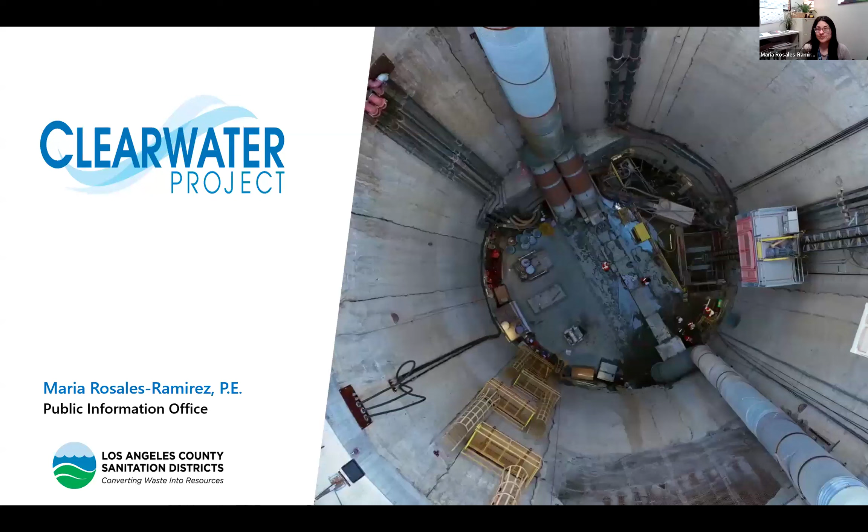Thank you. Hi, everybody. Thank you so much for the opportunity to be here. My name is Maria Rosales Ramirez with the LA County Sanitation Districts, and I'm here to talk to you about the Clearwater project, which is a project that I've been working on for the past 5 years. And actually, it's been a multi-decade long project for the sanitation districts. So this is a great opportunity to highlight the work that we do. Just to start off, I realize that many of you may not know who the Sanitation Districts of Los Angeles County are. So let's get a little bit into that.

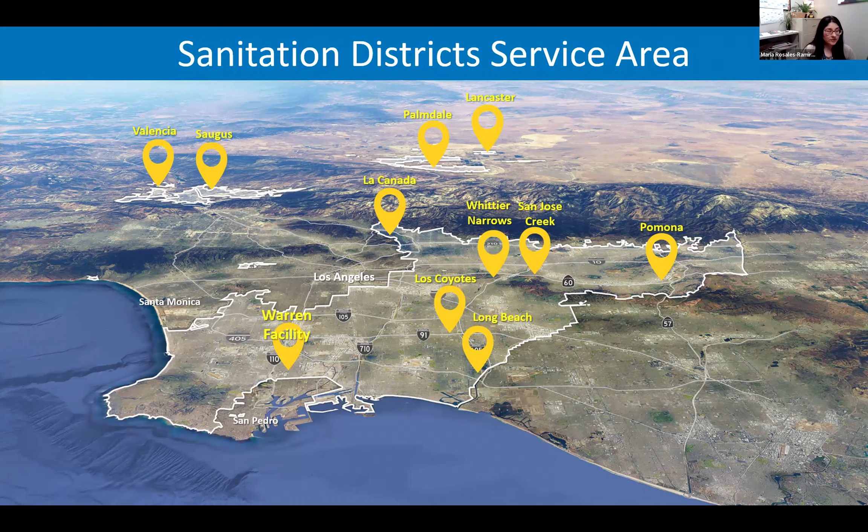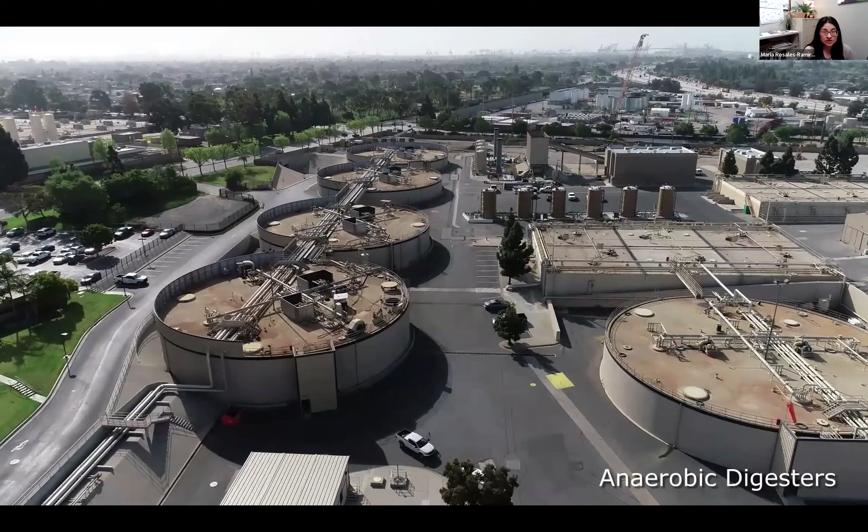This facility is quite unique because it does so much for LA County, just in terms of the services that we're able to provide. So I don't know if any of you are local. For those of you that were visiting on site, we met here. If you're driving down the 110 freeway, just past the Clearwater, you're able to pull over and see it. But this facility is the largest water treatment plant for Los Angeles Sanitation District, meaning we can receive up to 400 million gallons of wastewater a day.

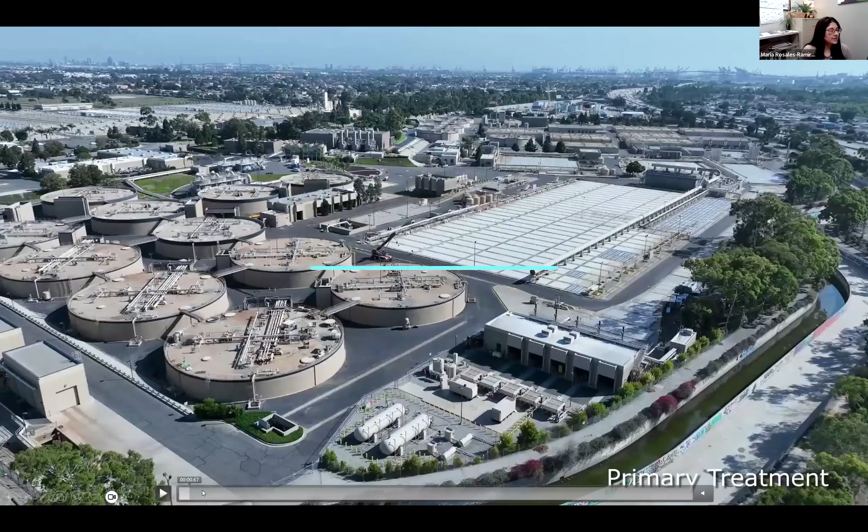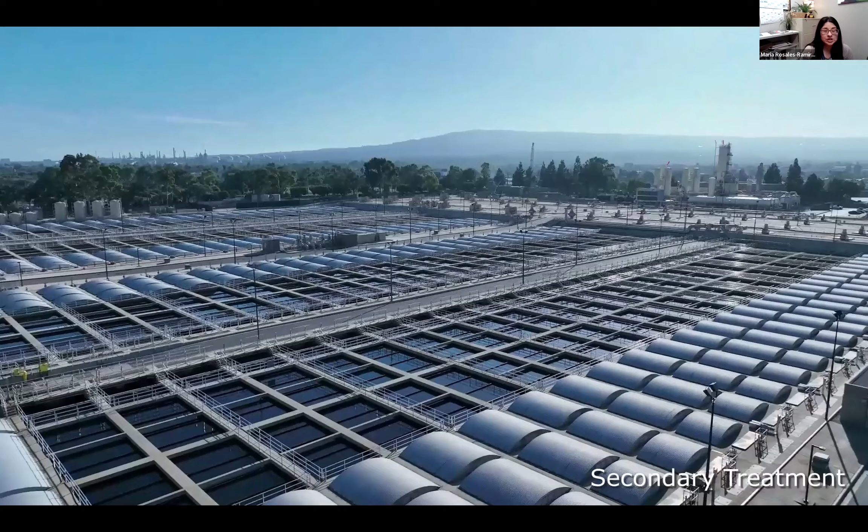And what we're seeing in the video, I'll replay the video a little bit again so you can see, is the different treatment processes that we have right here. We're going over our primary and secondary treatment. Again, we use standard processes to clean the water, and that's what we're seeing right here, our secondary treatment plants. But also we have so many other facilities ancillary to the wastewater treatment system. And this is our solids management. We're going to cover that in a little bit. And we have our power plant.

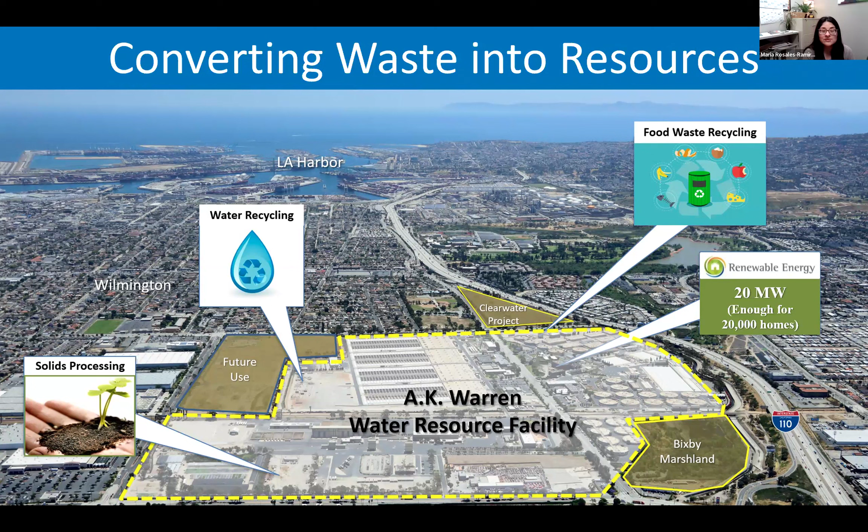And we also do solids recycling. So anything that comes into our wastewater system at this facility will get recycled at some point. So that's certainly exciting. But that's not the topic of today's presentation. That's a separate presentation that I'd be very happy to give if anybody's interested. The subject of this presentation is what happens to the water after it leaves the Warren facility. And those of you familiar with this area will say, well, you manage the water and you recycle the water, but where does the water go?

that was built in 1958. And that's how the Warren facility is able to clean the water and take it out to the ocean. We have these 2 tunnels. And so for us, knowing how much the Warren facility does for LA County, it's imperative that we're able to think long-term.

Does the Warren facility have all the resources to keep operating well into the future? And one of the things we identified was that having 2 tunnels, it's not ideal. We need some redundancy here.

So let's explore why. Well, the first thing is that this is aging infrastructure. These 2 tunnels were built in 1937 and 1958. And because of the volume of water that we produce, these tunnels have been working every day since they were put into operation. So we have no way of being able to inspect them.

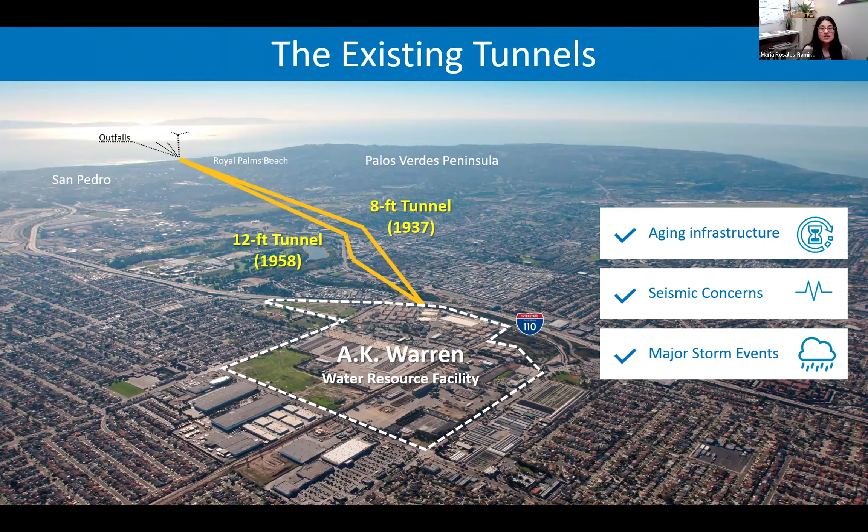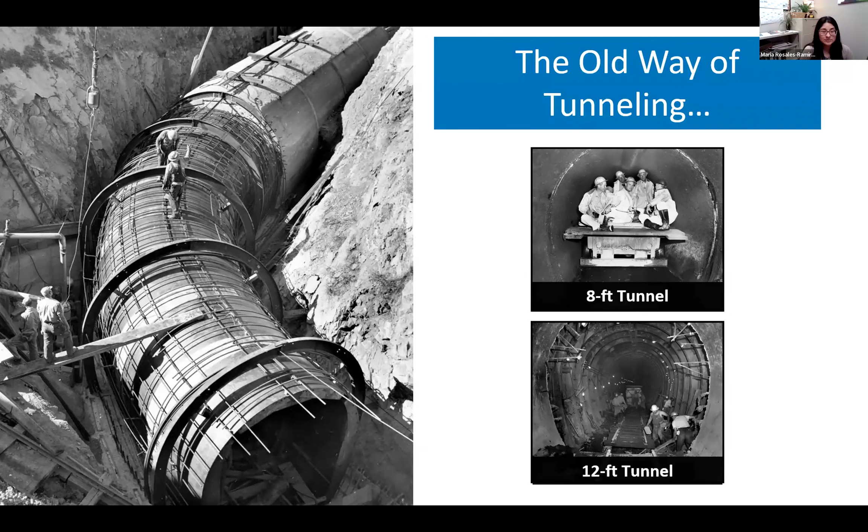So it was easy for us to trench our way across, drop our tunnel in as we see here, and then cover it up. That's not necessarily the way we build a tunnel now. For one, we have population and environmental considerations. We don't want this. We want this to be the least disruptive process possible. So what is the alternative?

The modern way of making a tunnel is the use of a tunnel boring machine, which is what we're showing you here. This isn't our tunnel boring machine, but this is an example of one, which is a magnificent piece of technology because it's able to do multiple things at once, and I'll walk through it. It's able to dig the tunnel, build the walls of the tunnel, and move the soil above ground.

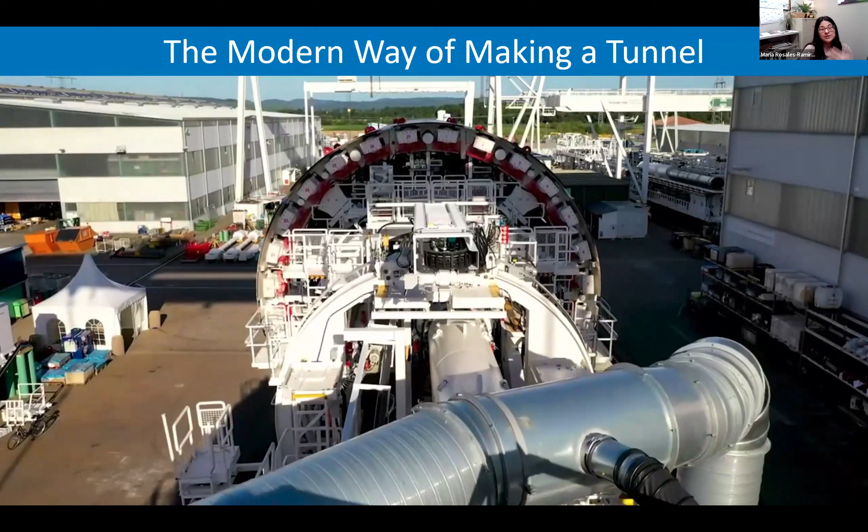So it's very efficient, it's the least disruptive, and it's able to help us finish our tunnel faster. So let's learn a little bit more about that. How does the tunnel boring machine work? So here we have a video showing how it works.

We see that part in orange is what we call the head of the tunnel boring machine. It actually spins and cuts away at the soil. Now, once it spins, it usually moves around every 5 feet. It pushes itself off the thrust jacks, which is what you're able to see right here.

And as it does that, each thrust jack is able to move independently to create space to put blocks of the walls. Each little wall is a little segment. So you can think of it as like a Lego. Each part of the wall is a little ring. Together, 6 rings make up the walls of the tunnel.

And also, I'll play the video again so you can see it. So this is right now cutting the soil away. I like to think of it as a cheese grater. Now you see the arms kind of moving, creating the space for the panels to be put in place. And then I think the video gets cut off right here.

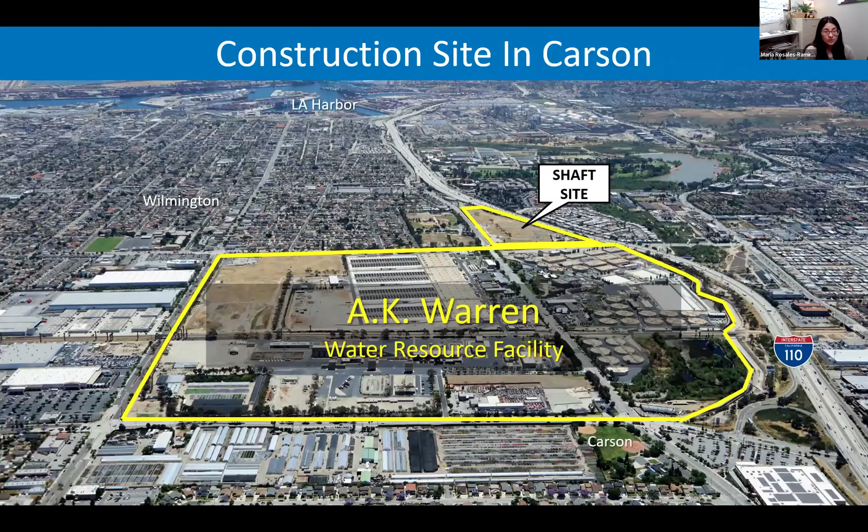Now, for our project, our tunnel boring machine is 800 feet long, 21 feet wide. So it's quite massive. How do we get this machine underground? There's no way we're going to be able to dig a hole that big. So again, we're looking at a footprint of the Warren facility in Carson. And I mentioned earlier how this was a multi-year long project.

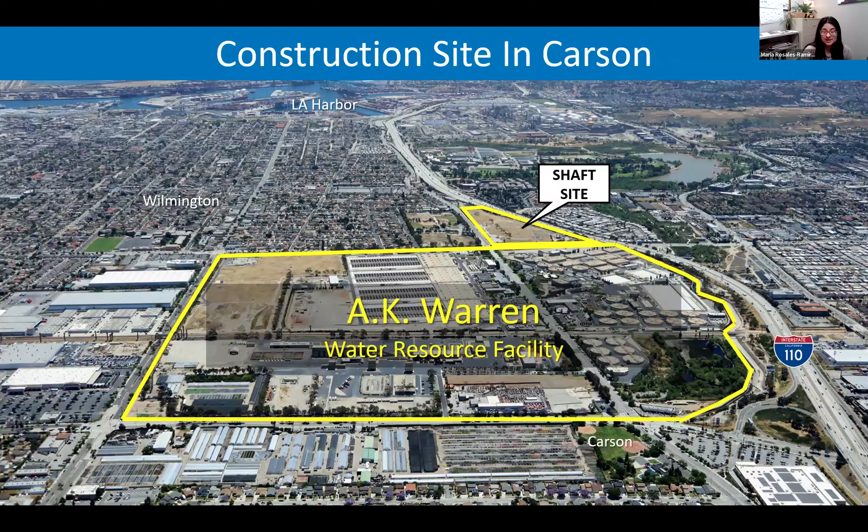Preparing for this point, we were able to acquire different properties. So we were able to acquire a facility south of our water treatment plant, so as not to interrupt operations, where we would build the starting point of the tunnel, and that's what we call the shaft site. So you can see it right there pointed out. Now, the idea is to drop the machine in pieces in a smaller footprint. So that's what we're seeing right here.

This is a video that's showing you the actual building of the access point, the shaft site, that will then be the entrance point right here. And that's when we actually finish the shaft site. Just to get the shaft site alone, just to get this hole in here to put the tunnel boring machine in place, was its own little mini technological project for many reasons. I'll rewind it here again so you can see.

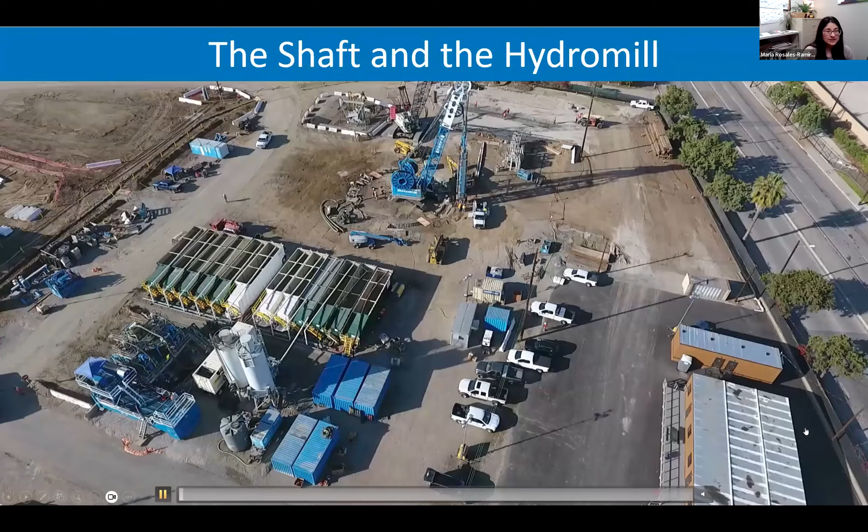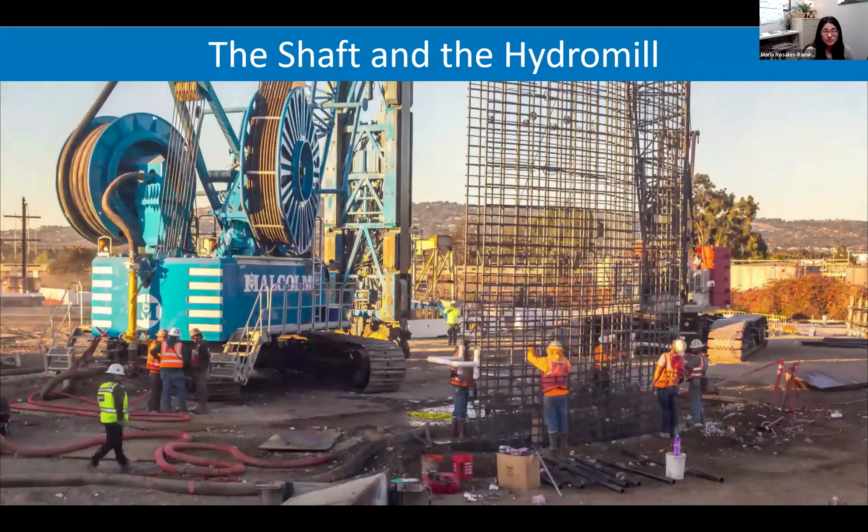To start, it's not shown here, but this project was actually almost completely underwater. So digging is not an option. What we had to do was use the Hydromill so that instead of carving out a hole, we were able to carve out sections of the soil and then put our rebar in. And that's how the walls of the shaft site were built in pieces.

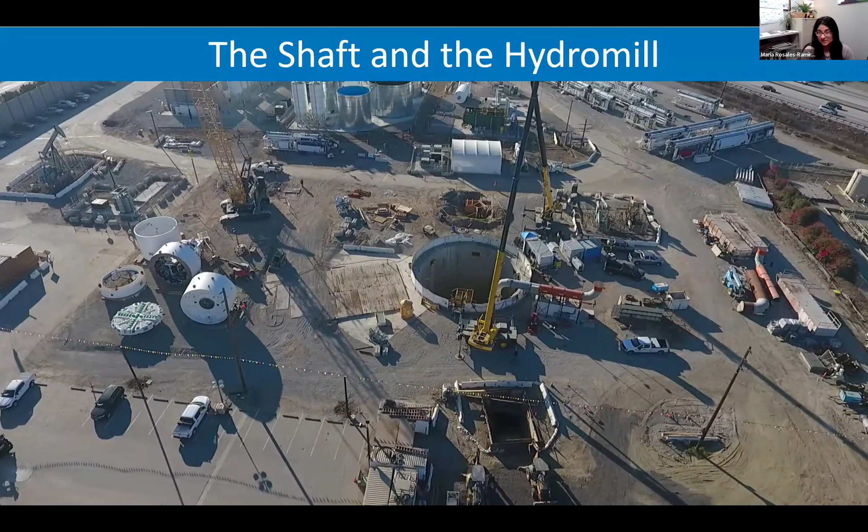So that's part one. And I also want to point out right here on the left side, here's the shaft site. Right here, you're able to see our tunnel boring machine was actually in pieces, because that's the trick to it. Our machine is quite long at full length, but it had to arrive in pieces so that it can be dropped into this shaft site in pieces and then assembled underground. I'll show you some more pictures on that.

Like I mentioned, this project was entirely placed underwater, so the walls of the shaft were built in sections. And then after that, we had to put a concrete slab at the bottom so that we could then drain the water out. So we had to use a specialized piece of equipment called a tremie pipe, which is pretty much a funnel that forces the concrete to the bottom and is weighed down so that the concrete doesn't rise to the top.

And then after that, we were able to build the bottom part of our shaft, and then we were able to pump the water out. So if you talk about special cool jobs, this is a professional diver that dives in dark water to be able to inspect a concrete slab. The shaft is 150 feet long, so it's well over 70 feet underwater. So exciting job right there.

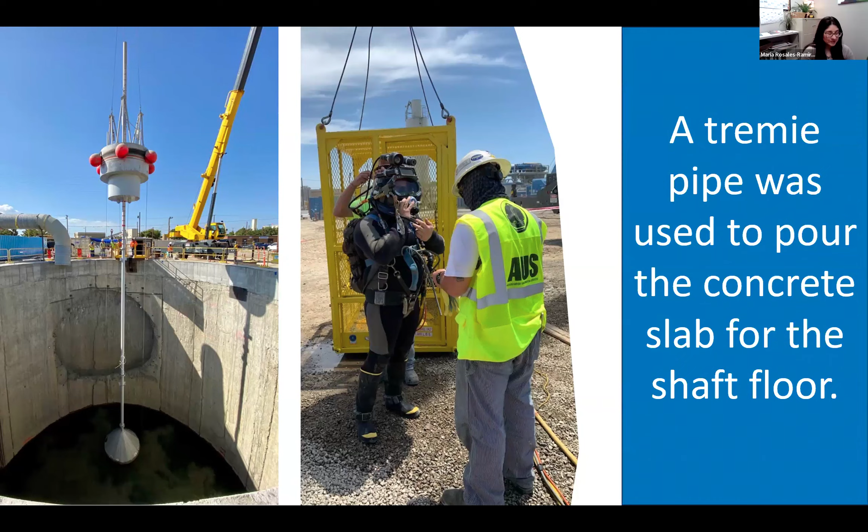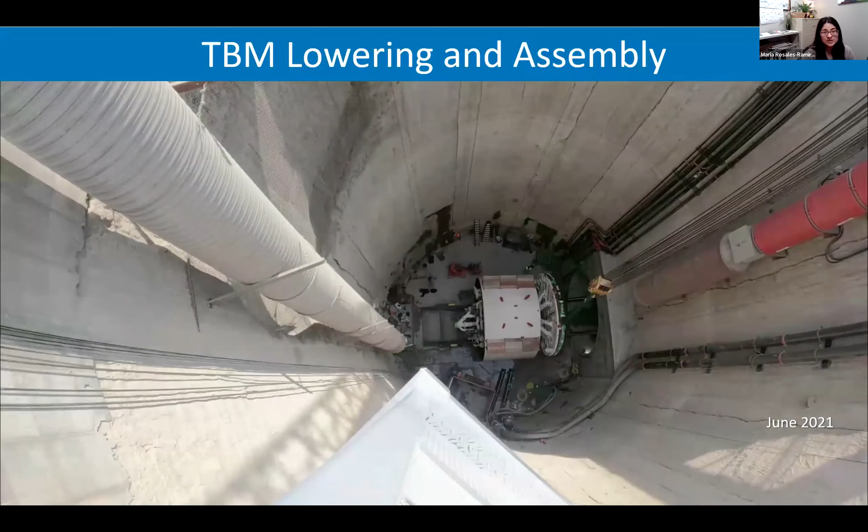So our shaft has been built, and now we have to lower our tunnel boring machine in pieces. Just a few facts about our tunnel boring machine. It was assembled in Germany. It was tested. Then it was dismantled. It was shipped over here in pieces. Then it was brought over by trucks. And this is how it arrived, piece by piece. So once it arrived here, we were able to lower it little by little, piece by piece, and it was being assembled and tested on the go.

Now, if you notice, there's a little bit of a tunnel right here to be able to start. We call that the starter tunnel, because if you picture a shaft, it's just a solid column going through, but it needs to have a little place to go. So that would have been our starter tunnel. And this is the head of the machine that has the carving equipment, this is the mining equipment moving forward. So this was exciting times. This was in 2021, I believe.

So now we got our machine underground and we're ready to start digging our tunnel. Let's see, so right here. We started digging our tunnel in November 2021. The project officially started in 2019, but it did take about 2 years to get the shaft property ready, the access shaft completed, and then the tunnel machine lowered and tested, and then we were able to start digging the tunnel. So what I'm showing you right here is the path that the tunnel boring machine will take and the different milestones that we have achieved and how long it took to achieve them.

So let's start with the most obvious question that maybe some of you have: why is the tunnel in this serpentine pattern? Why is it not a straight shot, like the older tunnel? Well, like I mentioned, this was a multi-year long process. In the environmental design phase of this project, we took in a lot of community input, and the resounding answer was that they wanted to make sure this tunnel stayed in public right-of-way, so that it did not go through residences or homes.

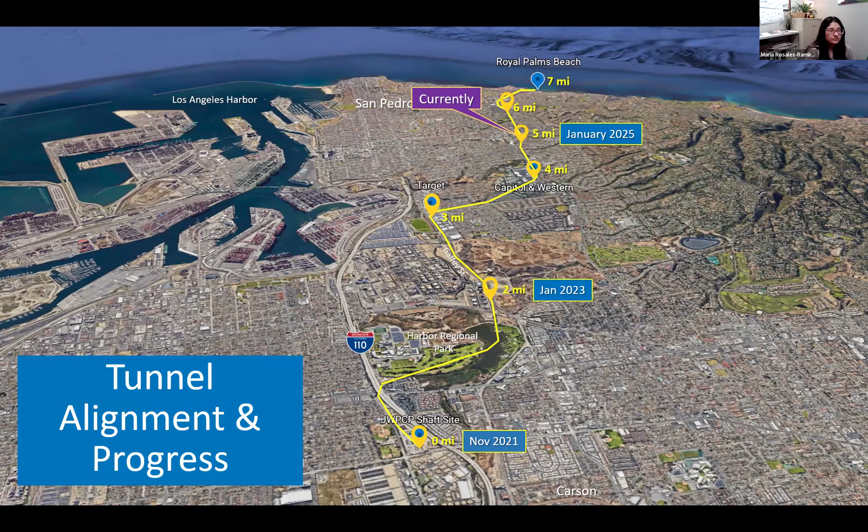And for a project that's been at least 2 decades' worth of a lot of hard work from our planning department, our engineering, our construction department, it's very satisfying to see that the end is almost here. So now I want to show you a video of what our tunnel alignment looks like. I hope you enjoy this video. I will try to narrate it really fast, but let's share the screen.

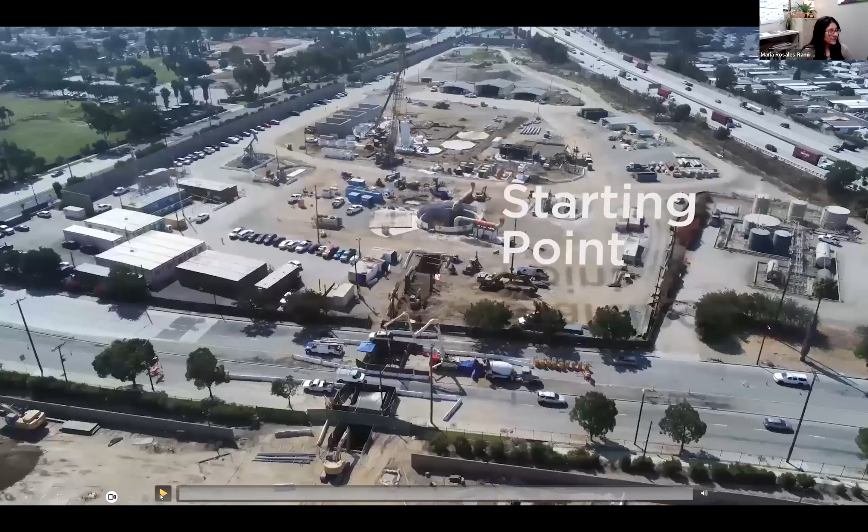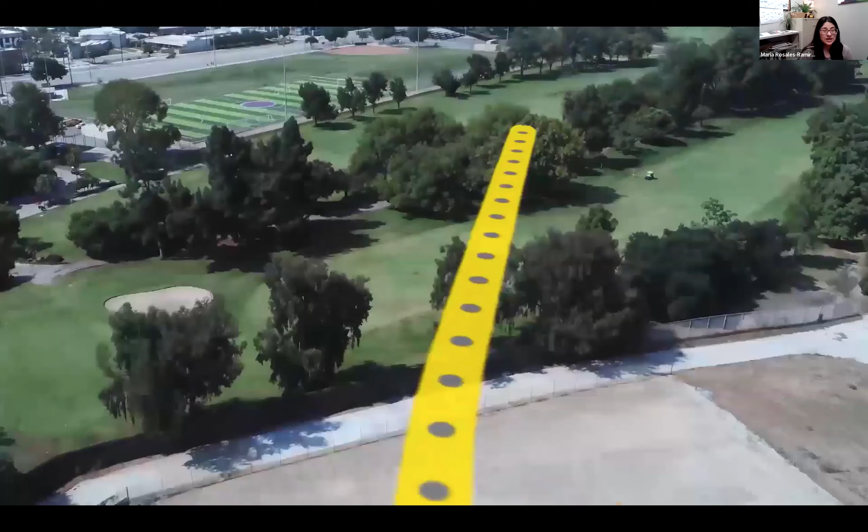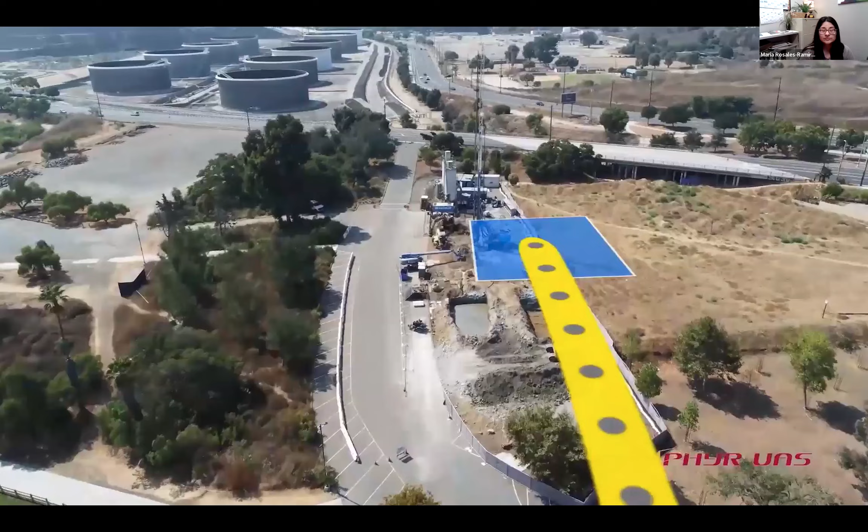So our tunnel started off on our site. We did go down Figueroa, if you're familiar with the area. We went underneath the freeway. We went underneath the golf courses. Most people didn't even know we were there. Also, if you're local to the area, we have the lake right there, Lake Machado. We went underneath there as well.

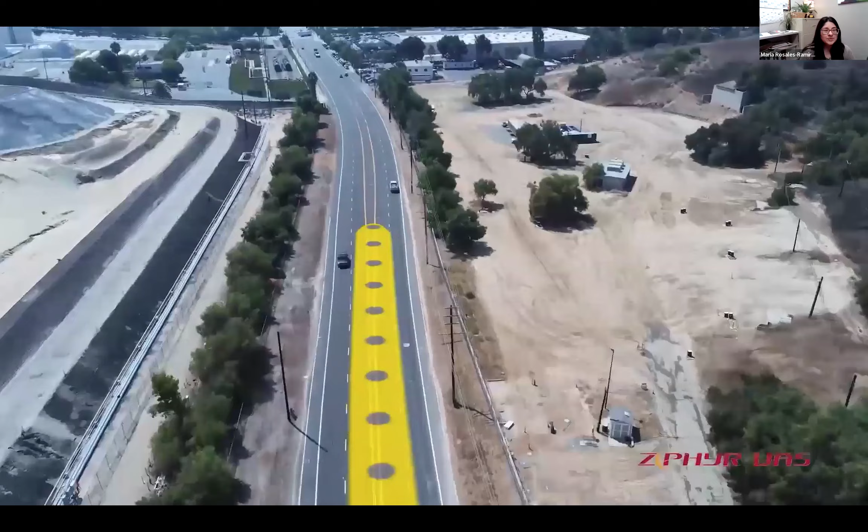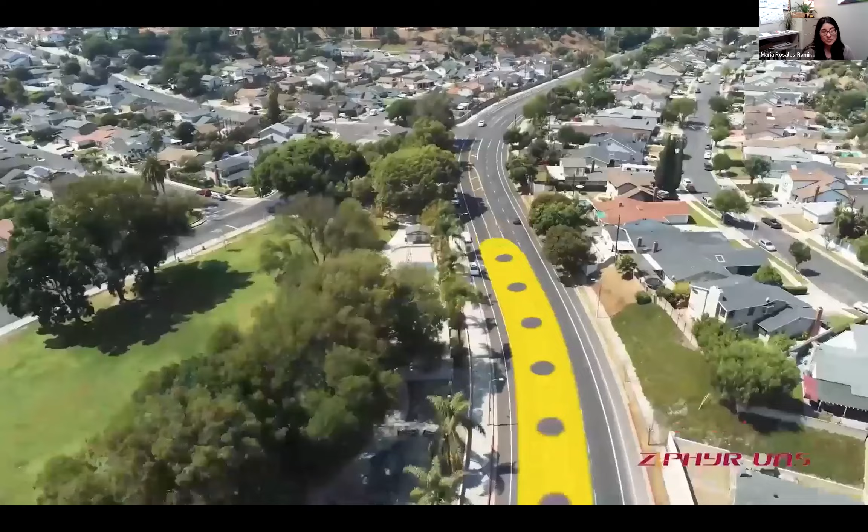We went down Gaffey Street, and it's not a residential area, it's mostly a commercial street. Continuing our way down, past the Home Depot if you're local to it. And then this is when we take the wide turn. This is the private business. So this is the parking lot of Target. That's where we had to go underneath them. We did have to work with our property planning group to get an easement.

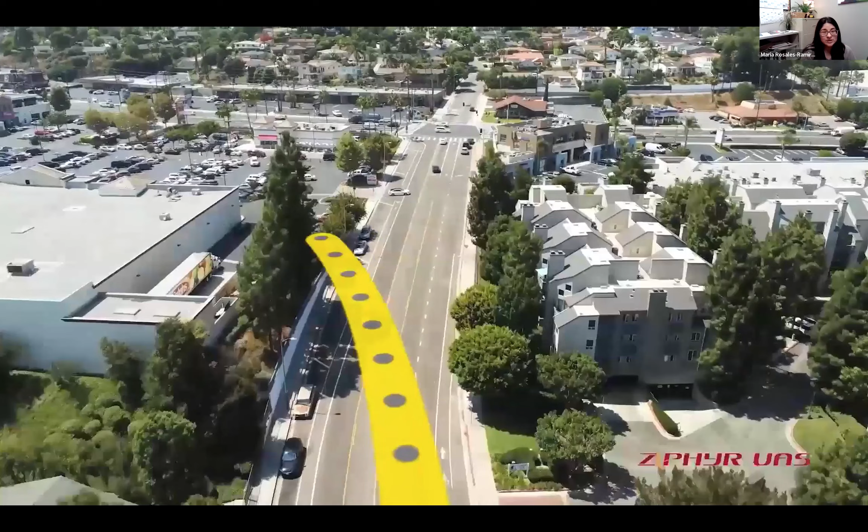Now you see we're going through homes, but again, this is a major street. So most homes were not even aware that we were there. Again, this is very satisfying because we're trying to be the least disruptive to the community. Now we are turning south on Western Avenue. And again, we're underneath a major street, well underground. We'll cover that in a little bit.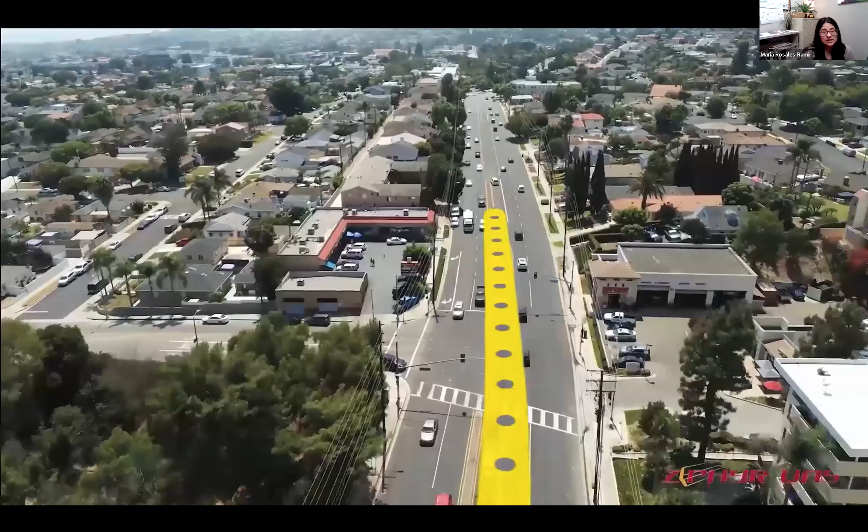And as we get further down Western Avenue, if you look to the top right corner, you can kind of see the beach is close by. So right now we're very close to where mile 7 is. So I hope you enjoyed that. It's a really cool recap of the last 4 years of our project.

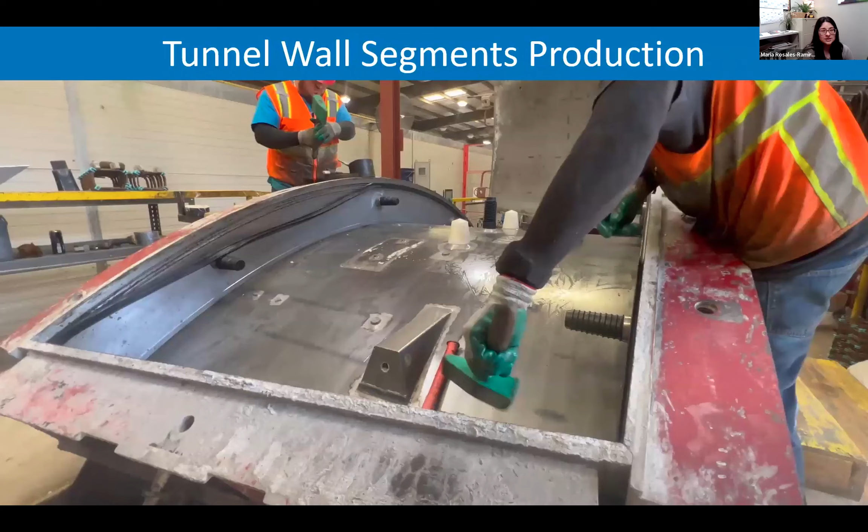But now we're going to cover building the wall. So I mentioned that the tunnel boring machine does quite a few things. We saw how it carved the soil. Now, how does it build the walls? Well, the walls themselves are their own engineering project. So we do have a manufacturing place where we actually build the walls. It's an automated manual process where you're able to create the molds for the concrete.

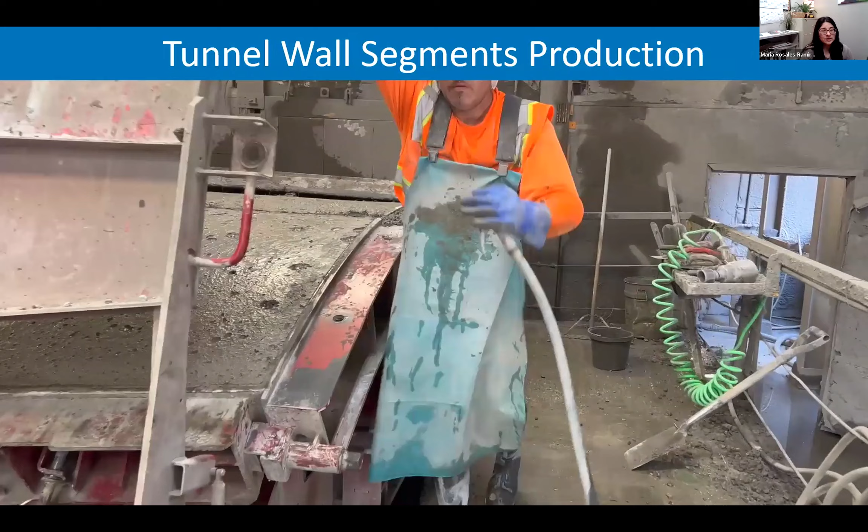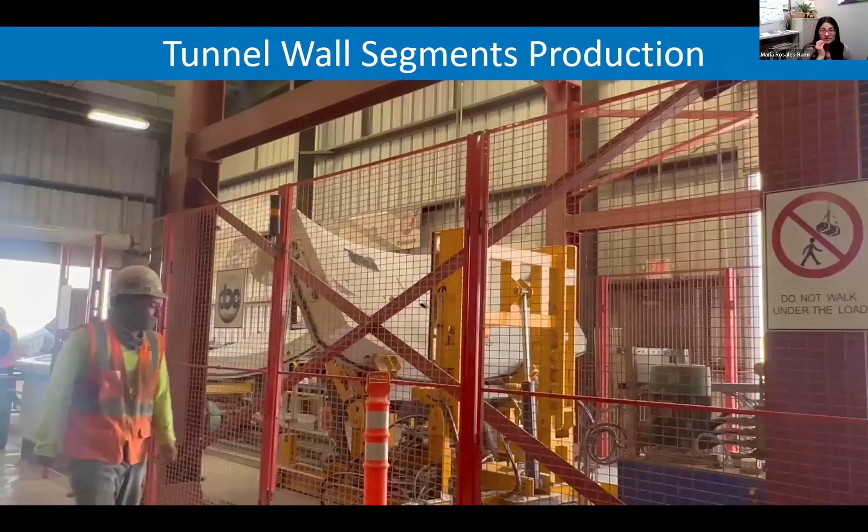So we can see here, and then they're obviously baked and secured, to make sure that each segment is produced to the highest quality. Fun fact about the project: the panels themselves all have their unique thickness and configuration, so that when they have curves, they're just rearranged differently. So that's a marvelous feat on its own.

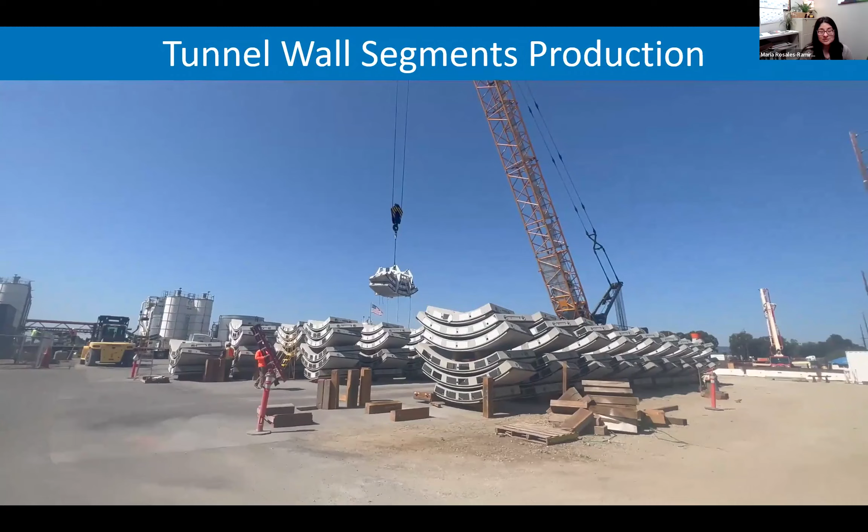And this is what I like to call a little tunnel farm, because the tunnel segments are actually manufactured in Palmdale, not at the project site, and they're inspected on site in Palmdale, and then they're trucked over to the construction site in Carson. So that's about a 2-hour drive away. Once they're here on site, they're re-inspected again, and then they're lowered into the ground. That's why you see them lifted up by the crane, so that the tunnel boring machine can build it.

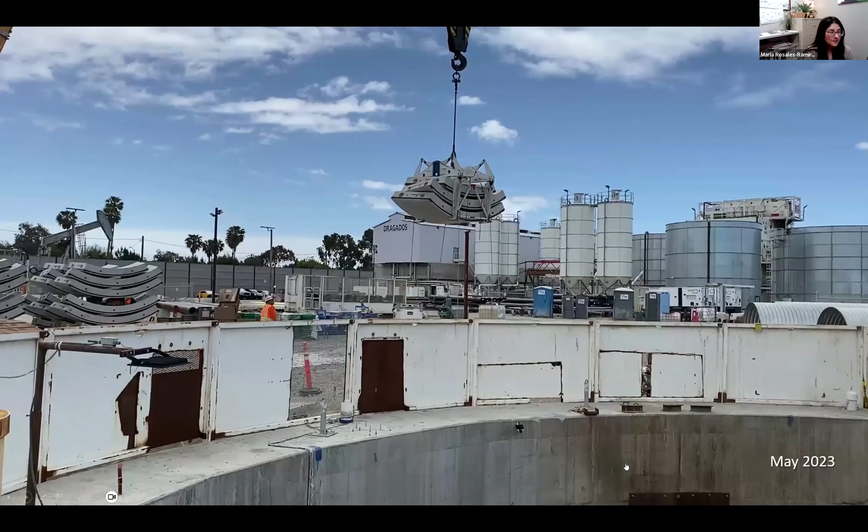So this is what we're seeing right here: the panels being lifted. We're using the crane, they're being lowered down the shaft, and we actually have a little vehicle that's able to transport all the equipment to the front of the tunnel, the working side, the front of the tunnel machine.

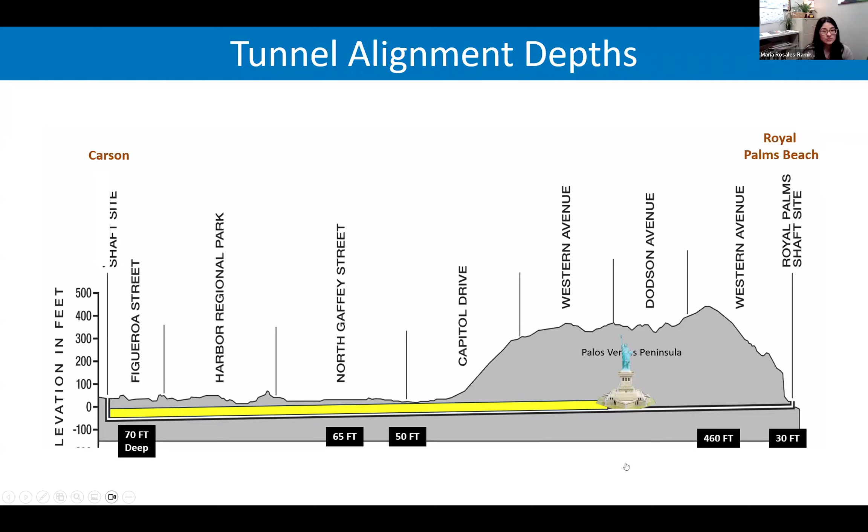So we did a little math in there. So this is way down there. Again, people don't even know that we are there. And that's pretty far down. That's beyond any vegetation or any utilities. Those are usually within probably the first 50 feet, I want to say.

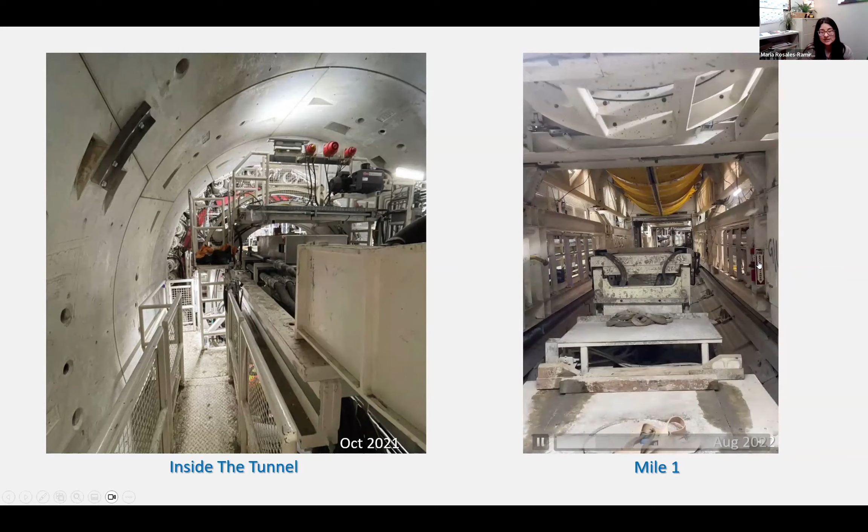Now, right here on the right, it's a little video that shows some of the equipment that's in there, but more importantly, shows you what the tunnel boring machine looks like if we were to walk our way towards the front. And this is only the first mile, but it really looks the same after that. So on the top, we also have air, communications, water, all those good things.

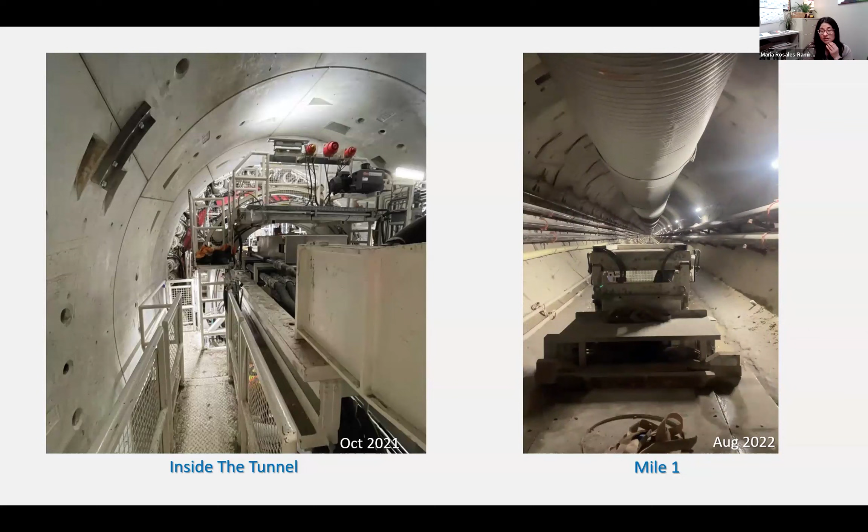And obviously the video is sped up, but this is also the way our crews are moved to the front, equipment being sent out. And I know I sped it up a little bit for your convenience, but right now it's taking about a 45-minute drive to go from the shaft site to the front where the tunnel's actively mined.

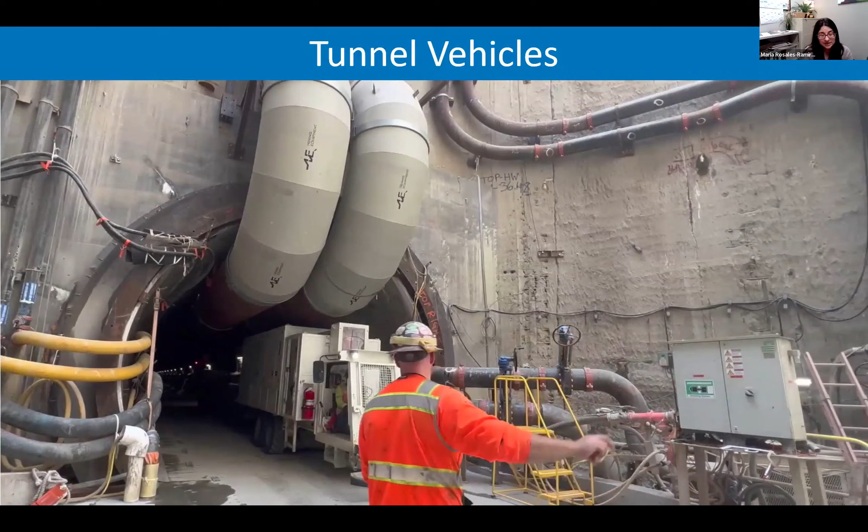And let's say we're coming on the way out. This is the front of the vehicle. Sorry, the bottom of the shaft, the beginning of the tunnel, and this is how that machine looks, the rubber gantry crane, rubber tire vehicle. It's at the bottom of the site.

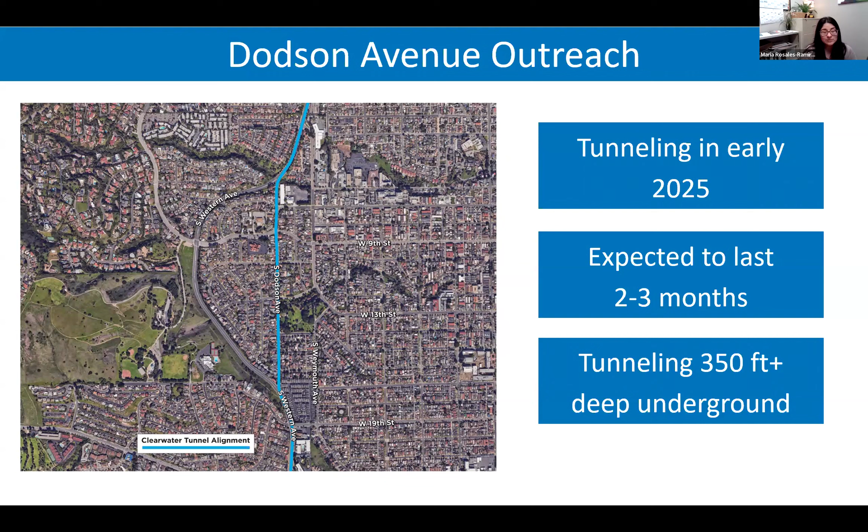But as we can see here, if we had followed the main street, which is Western Avenue, the street naturally curves around, so it was more efficient for us to finish through Dodson, a smaller street. We want to be courteous to our neighbors. So we did some special outreach to our neighbors on Dodson Avenue. We let them know that we were going to start tunneling, which we did just last week. But we're way in, 350 feet deep underground. They're not going to feel anything from our end.

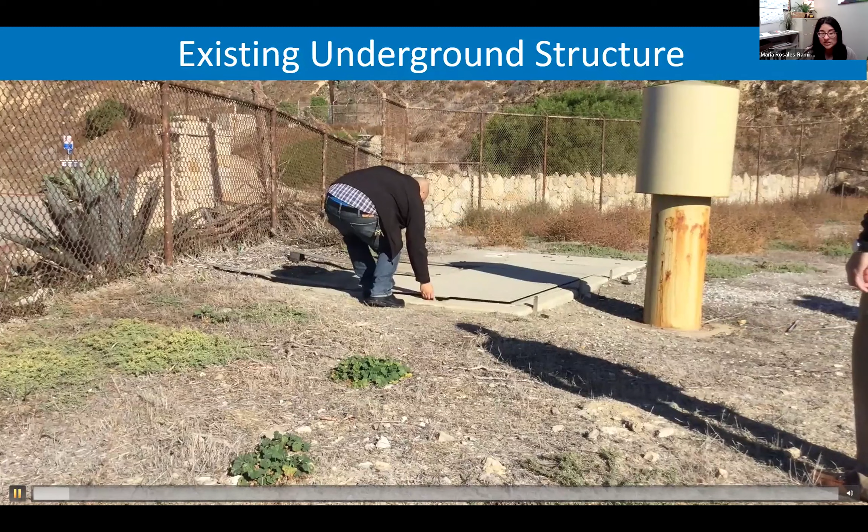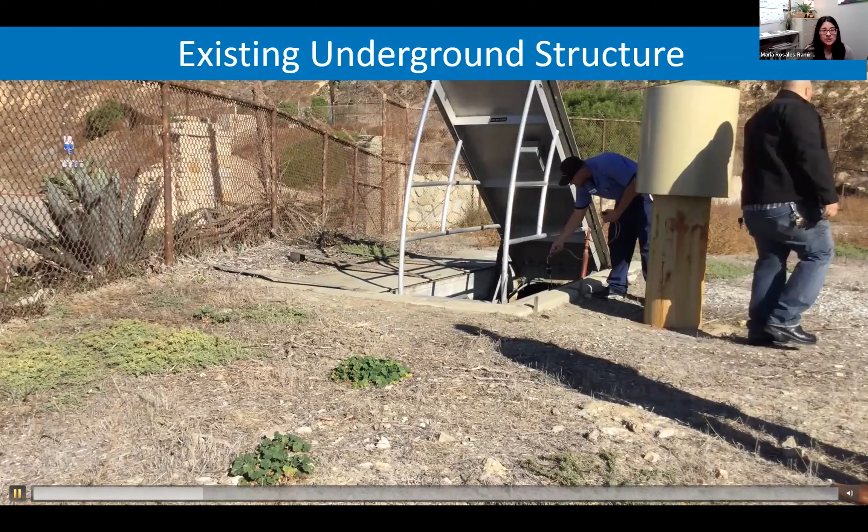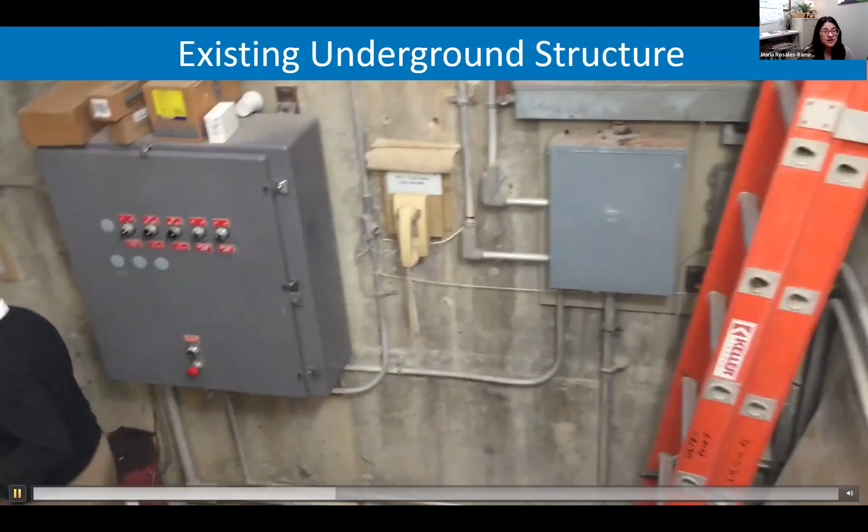All right, so this would be confined space entry, which means not just anybody can go in. You have to have some sensors. This facility is normally closed to the public, obviously. There's really no need to enter it, just regular monitoring. So this is what our friend here is doing, checking the air, and then we get the clearance to go ahead. This was my former colleague, Glenn Acosta, who used to be in charge of this project about 2 years ago. And this was my first time that I got to visit the manifold structure, which is what we call it.

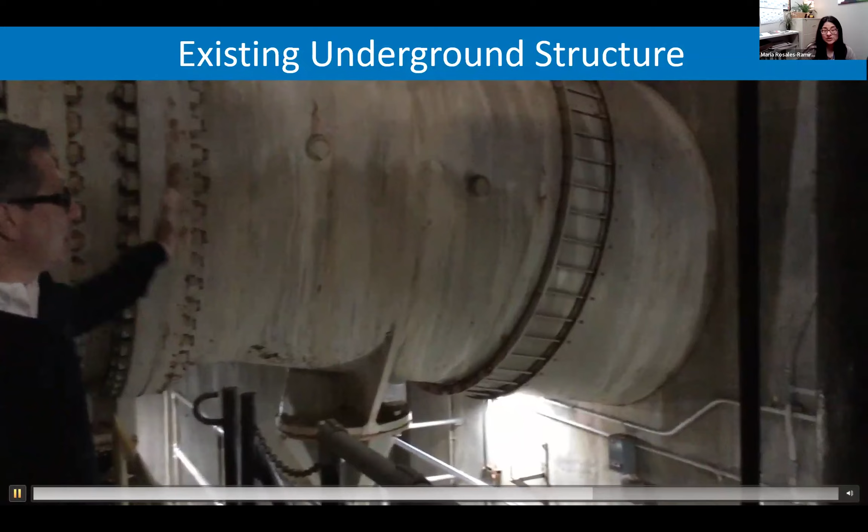So forgive the nature of the video. But underground in here, we have these pumps that take the water from the two tunnels. Tunnels carry clean water again, and they rearrange it to 4 outfalls. The difference between the tunnel and the outfall is the tunnel carries the clean water underground, but the outfalls carry the clean water underneath the water in the beach along the ocean floor.

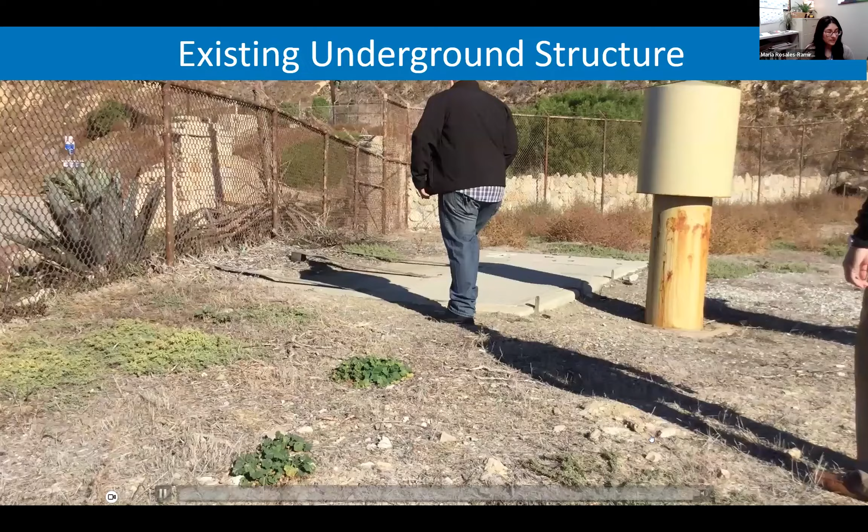And then at the end of these outfalls, they run about a mile and a half underwater. The water is released slowly into the ocean and it gets blended in. So it's not like a waterfall. It's slowly introduced into the system.

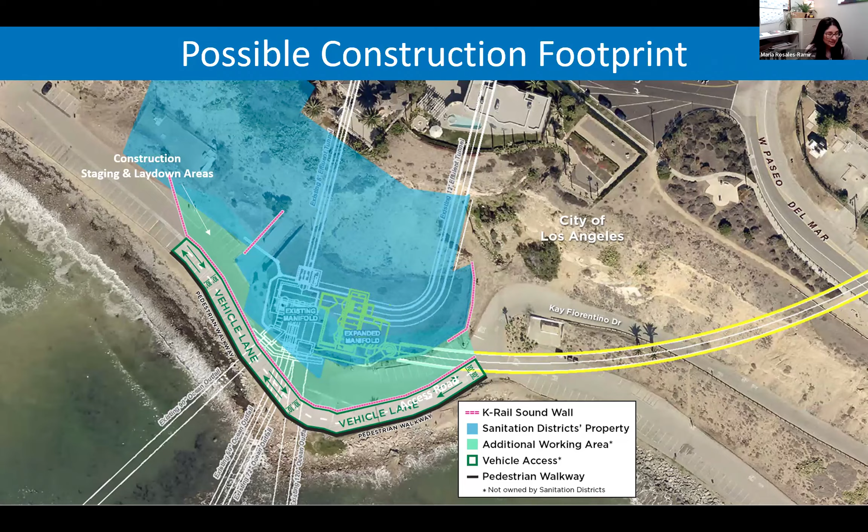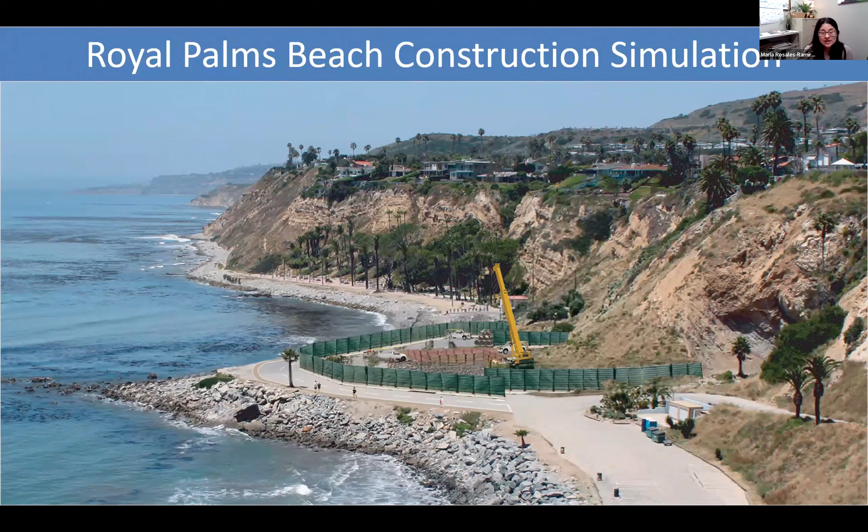So this is kind of unique that we have to make the most of what we can with this construction in this tiny footprint. And this is our possible simulation of what this construction could look like once we get there. Again, we're trying to separate the construction area from the guests that enjoy the beach regularly. But this is like real life examples of us working with the community. Again, we want to make sure everybody's safe, but that our site is secure for the construction of our project. And then we put a visual barrier, not just a fence, and a noise barrier, because it will get a little noisy there.

So project timeline. This is the chance when we can see the many years spent on this project. We started the planning and outreach process in 2006. Our board formally approved this in 2012. So that marked the end of the planning phase. This is the time that we were collecting input from the community. And once the project was approved, it moved into the design phase. It was there for a solid 5 years. There was quite a lot of construction and engineering and design itself.

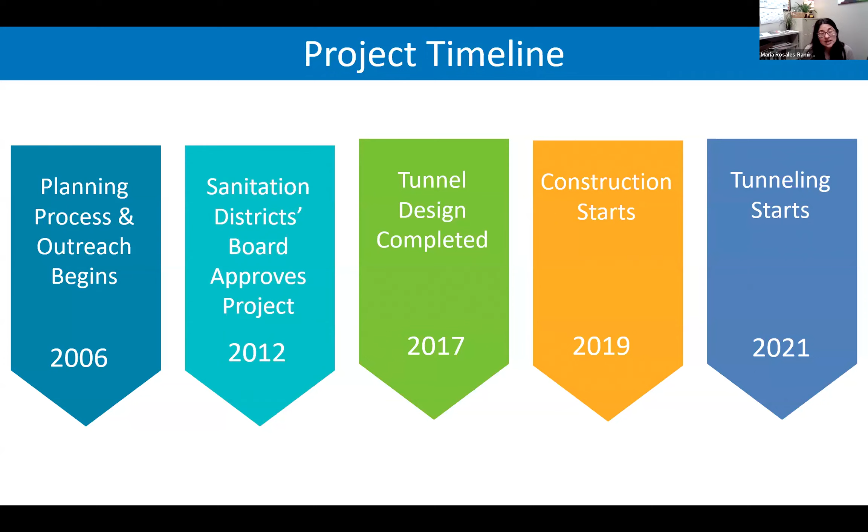So the tunnel design was finally completed in 2017. Very shortly after that, the project was awarded construction, and that's when we were able to start construction in 2019. By construction, I mean getting the shaft site ready so we can accept the TBM, assembling the TBM, and testing the tunnel boring machine. And then we were able to start tunneling in 2021.

So what do we have left to do? Well, in order for us to be able to finish the tunnel and receive it at the end, Royal Palms Beach, where I'm showing you the slides, we need to start doing some work ahead of time to make sure that we have a mini shaft site to be able to get to the machine, because when the machine gets to Royal Palms Beach, it will be 30 feet below ground.

So we need to do some work. That's expected to start in the summer, late summer this year. Later in the year, probably in the winter, that's when we expect the tunneling to end. So obviously we have to make sure we have a place for the tunnel machine to be received. And then I mentioned it will be another 4 years in this case to be able to finish the work at Royal Palms. And then this project will be done and it will be ready to serve LA County for many years, at least 100 to come.

So with that, I thank you guys for your time and I'm ready to answer questions, Nick. All right, excellent. Thank you, Maria. Very good comprehensive presentation. All right, first question.

For the design portion of this, what kind of seismic analysis was done? Oh, there was quite a lot, believe me, because part of the seismic considerations was that they had to pretty much see which faults were going through. I do know that there were 3 fault lines, but only one was active. So along the 7-mile parts of the tunnel, the tunnel is reinforced for seismic consideration in 3 different spots.